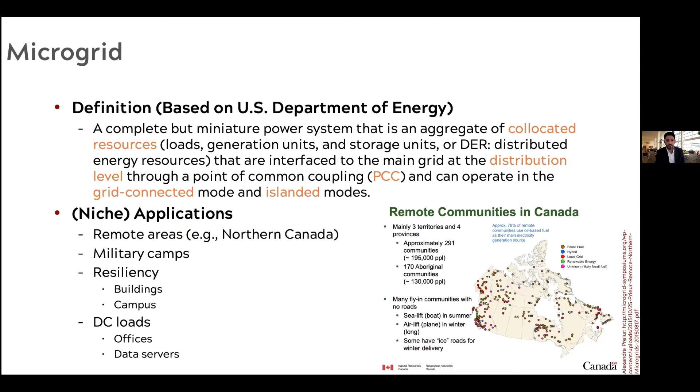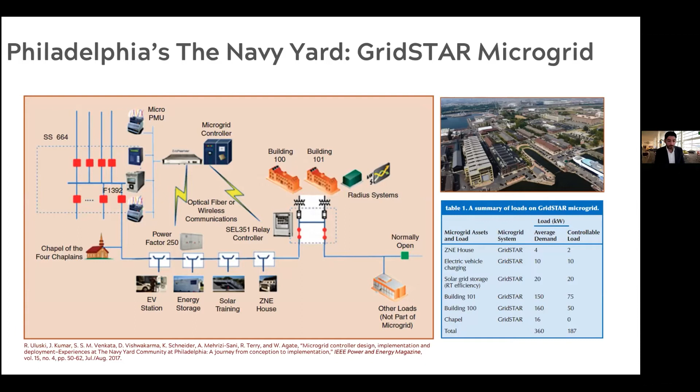And the idea was to enable operation of this Navy Yard as a microgrid to ensure that we had availability of power for the highest tech tenants that they had. The bakeries, essentially commercial entities, bakeries, Old Navy, the clothing store, offices, and so on. So that was kind of a demonstration project quite a few years ago.

Actually Washington, my previous state and my new state, both of them have quite aggressive renewable portfolio standards. Both of them 100% by 2045. California, 100% similar by 2045, and so on. So just a disclaimer that most states in the US do consider hydropower to be part of the renewable portfolio.

Washington actually considers, I found this back when I just became a professor, fuel cells. It's based on hydrogen, but they also consider that to be part of the renewable portfolio. Essentially, that means they can use some of the incentives.

So now, with the exception of the hydropower, most other renewables, mainly PV, solar photovoltaics, and type 3 and type 4 wind units, use inverters to interface the energy generated to the grid. Essentially, the PV units need inverters to convert DC power to AC. Wind units already generate AC, but then they need inverters to be able to condition that power and interface it to the grid at a higher quality, essentially a nicer sinusoidal, regulated frequency type of waveform.

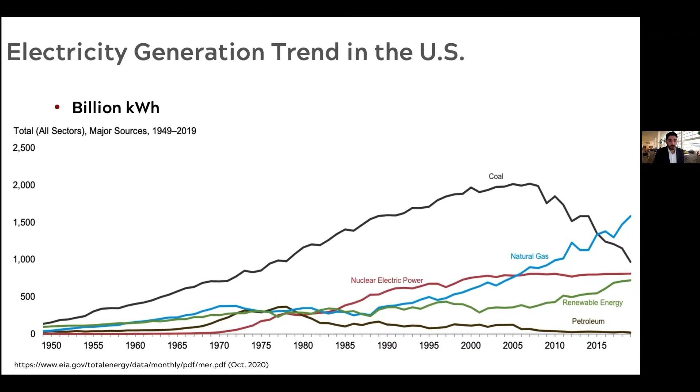So with this shift to inverters comes variability, more distributed generation, different protection strategies, different power flow patterns, and so on. Essentially, what's happening is the generation and load mix is changing. So for example, the BPA service area, I'm sure you're familiar with Bonneville Power Administration, providing power to Washington, Oregon, Idaho, part of Montana.

They have experienced several times 100% wind generation. Typically, this happens in fall, in the October timeframe, because there is not a lot of water. There are fish restrictions, and most of the generation can come from wind. The ERCOT system in Texas has also had instances of 50% instantaneous wind. And the Australian power system also experiences quite routinely more than 70% instantaneous inverter-based generation.

So again, we are moving from a synchronous generation-based power system to a power system that has more and more inverters. If it's the main power system, as we discussed, because of wind and PV and so on, we're getting more inverter-based generation. If it's microgrids, many of them do use inverters as their main form of interface between generators and the system. Of course, a similar thing is also happening for the loads.

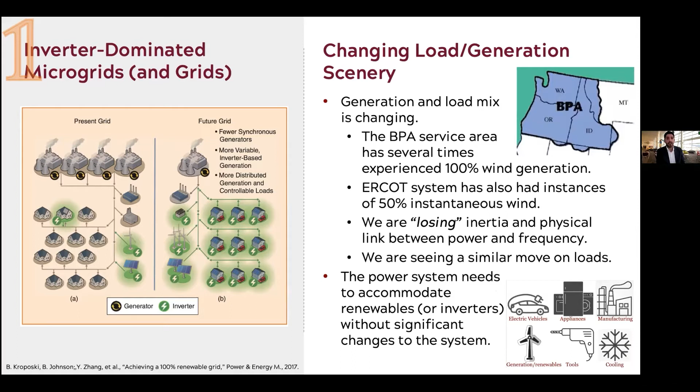We are moving from just motors to drives, which are really motors plus inverters that allow more control. With lights, more and more lights are becoming converter-based, and modern appliances also have intrinsic converters inside. So on both the generation side and load side, we are moving to more and more inverters.

So this transition has also brought about changes in the operational standards. For example, the minimum standard for integration of renewables, IEEE 1547, in its first iteration, actually required that inverter resources, or DERs in general, would disconnect in response to a disturbance. So essentially the idea was, hey, we don't really know, and this is 2003, we don't really know how you work. So when something happens in the system, please just disconnect, hoping that you're not doing too much harm.

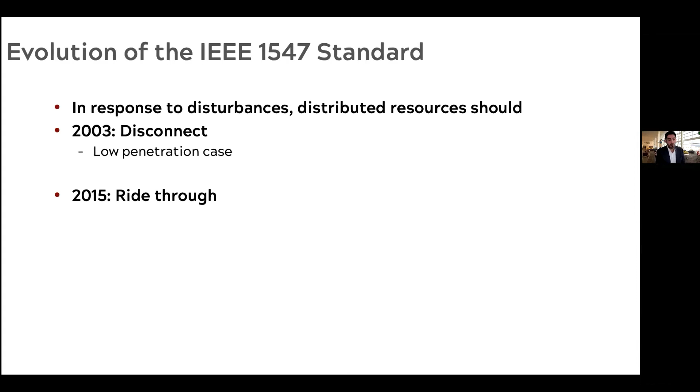It took the community about 12 years to feel the need and then come up with an updated version of 1547. So in 2015, the standard was updated to actually require the DER units to ride through disturbances. So from, hey, disconnect, now the inverters or DERs in general are required to ride through. So the idea is, well, don't disconnect, we need your generation, but don't do much else either, because we still don't really believe in your capabilities, right? That was kind of the thinking.

And then only 3 years after that, in 2018, the standard actually started requiring the DER resources to provide support. So previously it was, in 2003, disconnect, then standby, then actually actively contribute. That's the 2018 version. And that's what the new power system terminology generally refers to as grid support capabilities. Things like voltage ride through, frequency ride through, voltage support, frequency support, startup ramp rates, and so on.

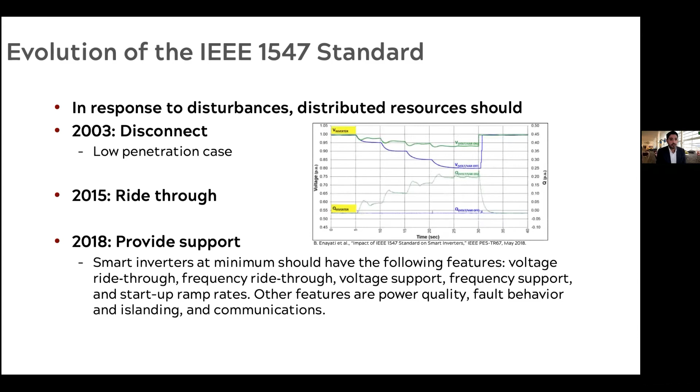Then these inverters that we talk about, regardless of their topology, regardless of exactly how their circuit looks, can operate in two main modes of operation, either grid following or grid forming. Grid forming has become kind of a buzzword these days. Essentially, they're considered to be the key to operate the power system with large shares of inverter-based resources. And the terms are slowly becoming a standard. I remember I first read these terms in a paper. It was a very good paper back in 2007.

But I guess the power system community at some point decided that it needed to refer to power electronics with terms that were familiar for the power system community. So they introduced the term grid in the classification of these inverters. So now we call them grid forming, grid following, and so on. Of course, names are important. The moment the term grid forming became common use, power electronics also became a friendly thing. So that has helped quite a bit with using more and more power electronics in the power system.

Now, the way that I try to understand these terms is I say grid here almost means voltage. So a grid forming inverter would be an inverter that creates or forms the voltage for the grid, and then the grid following would be the one that follows the voltage of the grid. And roughly these terms are equivalent to master and slave controllers in microgrid terminology, or again, roughly PV and PQ buses in the standard power flow problem.

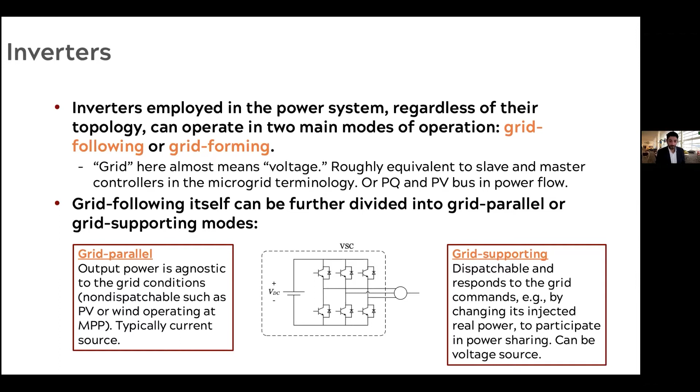So with that introduction, let's see what we will specifically be talking about today. We're going to look at the problem of control of gray-boxed and variable inverter systems. I say gray box instead of black box because typically we know some stuff about our inverters. We don't know all the details, but it's not that we are totally in the dark either.

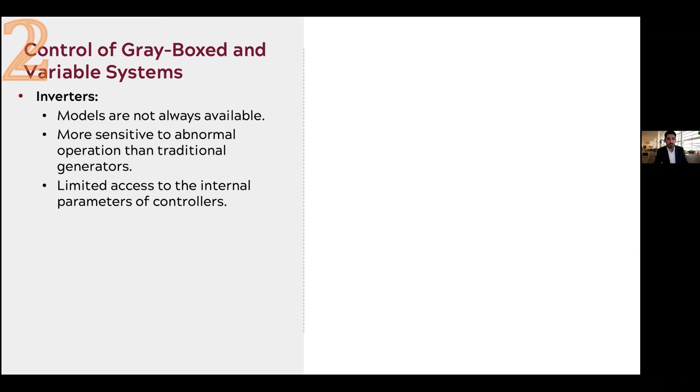Now, what is the challenge? With inverters, the models are not always available to us. Manufacturers and vendors do not share full-fledged models all the time. Inverters, of course, are based on power electronics, so they're more sensitive to abnormal operations compared to the traditional, good, robust synchronous generators that we used to have in our power systems. And I just mentioned we don't always have their models, but we don't always have full control over the parameters of the controllers either. So again, we know some stuff about those inverters, and we have some control, but not a lot of control.

At the same time, another reason that control of inverters is a challenge is the setting that we use them for. We just mentioned that we use inverters mainly when we have lots of renewables or when we have microgrids. And in both cases, the system changes quite frequently. So redesigning controllers would become quite a bit of a challenge. And even if you do redesign, the new controller would work only for some pre-specified configuration, and the performance again deteriorates when the whole system changes.

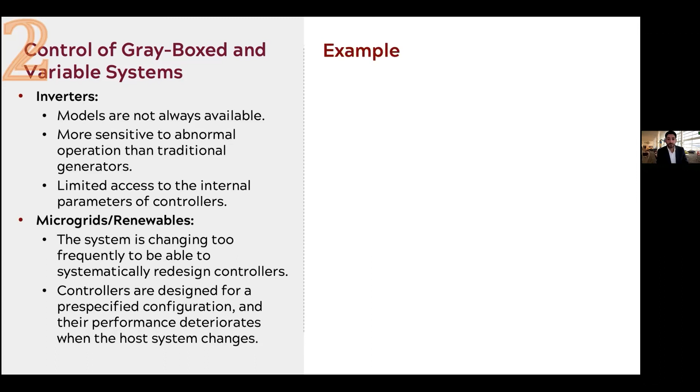So here's an example of what I mean by this. Here on the top right, you see the original system and its response to a certain step change. The overshoot 15%, settling time 32 milliseconds, something acceptable, not ideal, not too beautiful, but it works.

Now, same system, I disconnected one of the loads. Of course, this was a microgrid system. I disconnected one of the loads and I applied the same step change. Now, the overshoot is almost twice bigger than what I had before. So from 15, I went to 26%. And my settling time is also longer. Instead of 32, now I have 67.

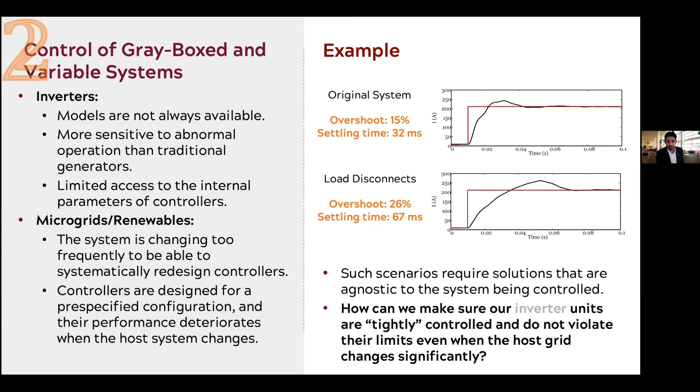So same system, same disturbance, well, almost same system without the load. Same disturbance, now I get very different responses. My system has become quite a bit slower. So the main question is, how can we make sure our inverter units are tightly controlled and do not violate their limits, even when the host grid or microgrid changes significantly? So that's kind of the control problem we are going to be talking about today.

Of course, control is not new. There are lots of efforts in terms of control. It's been an active area of research for as long as I remember, and it will remain an active area of research. Essentially, any engineering system you build, you have to be able to control it. Otherwise, it will be kind of like drunk driving. So that is going to be kind of an integral part of whatever we do as engineers.

If I want to very roughly categorize existing approaches for control to ensure that the dynamics of the systems are handled, we have analytical formulation and model-based tuning, in which essentially we develop a mathematical model of the system and then use linear, nonlinear control methods to devise the control parameters, or optimization-based methods where we create a model of the system in a transient simulation program. PSCAD is very commonly used these days, and then we run multiple cases to minimize some cost function by finding the optimal values for those control parameters.

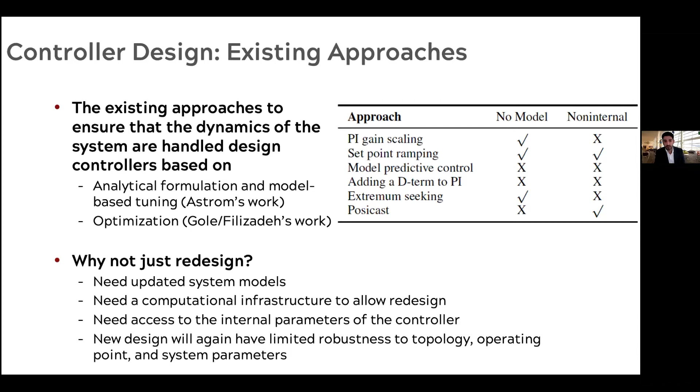This method can also refer to machine learning based control design, because essentially at the end of the day you have to optimize the gains for your neural network or whatever type of design you have. But the problem is they have limited robustness with respect to topology. Essentially, when the system changes, we have to redesign these controllers. And if retuning is needed, then it would be difficult because we have to go back to the field and implement the new changes. Of course, they need the models of the system, which is not really a luxury we can always afford in terms of inverters.

So we're going to look at this from kind of a fresh perspective, essentially an alternate idea. Instead of updating the controller structure and the parameters, which is essentially what the bulk of literature does, we seek to get a better response by instead manipulating the set point itself. So when you want to design a better controller, of course, the first thing that comes in mind is to update the controller itself. But in my case, if I do not really have access to that controller, then the idea is I try to manipulate the set point instead, which is essentially the easiest thing I can change because set point is something I provide anyways.

So, but how? We don't want to change our original controllers, as I said. We want to keep them in place, but we want to augment them with an add-on feature. And essentially, the basics of how this method works is this small graph over here. So assume the set point for some x of t has changed from x1 to x2. And that x of t could be any variable that I control. Could be current, voltage, real power, reactive power, angle, torque, whatever I'm trying to control. So the set point changes from x1 to x2.

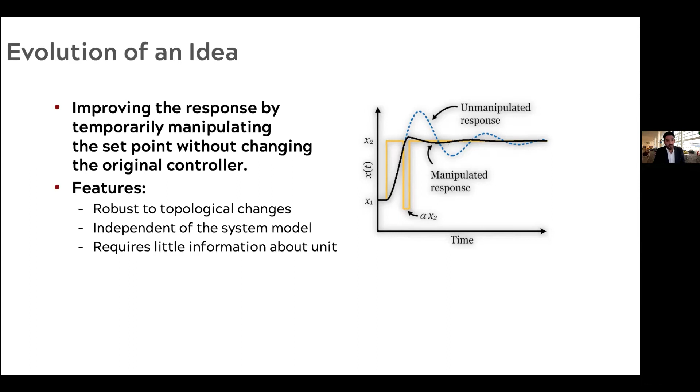So this is the essence of the idea. Extremely simple, also very effective. We're going to see a number of case studies to see how this method works. But first, in terms of how this method is going to be implemented, you have this standard control methods, a unit, your inverter, the primary controller, and typically these two are in a gray box because that comes as part of the inverter. And the set point comes from some higher level control.

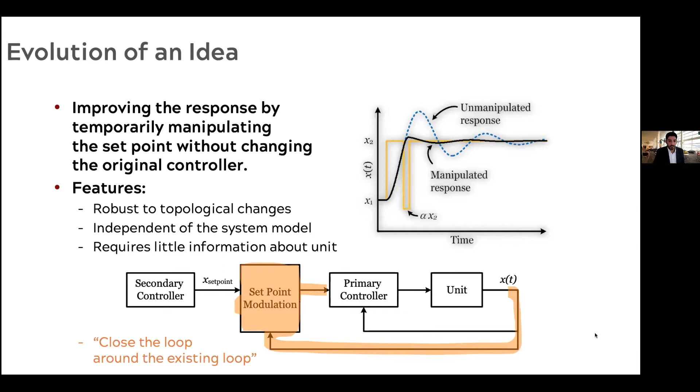What we are doing here is we are adding this set point modulation block that looks at the set point, looks at the response of the system, and based on these, it's going to manipulate the set point that actually is fed to the inverter system. And we are hoping that we get a response as beautiful as what I'm getting over here. So in a sense, what we are doing is we are actually closing another loop around the existing control loops of the system. So we are adding this loop.

All right. So of course the question is, how do I do this? Now we have shown for certain systems, and again a disclaimer, I'm talking about this to give you some confidence that this method is implementable. The idea does work. We are going to talk about the actual implementation in a bit, but let's see that this method does work.

Our initial idea was to apply this modification in the set point at some point T1, and then release that set point at some point T2. If you play long enough with the response of the system, you see that one of the good things you can do here is choose this time T1 so that when I reduce this, the peak of this response equals the reference, and that's how we choose T1. And then T2, the time that I release the set point, would be the time of this peak. So in this case, I actually need to release the set point exactly at this point.

So here's an example. This is the original response. This is now when I apply a set point change at time T1 and I release it at T2. Now this T2, you see that it's not exactly time of peak. Interestingly, my response is already better, but I was hoping for something even nicer than this. So let's see what happens when T2 becomes closer to time of the peak. So that's my next attempt. Response is better now. T2 becomes closer to time of peak. Better response, even better now.

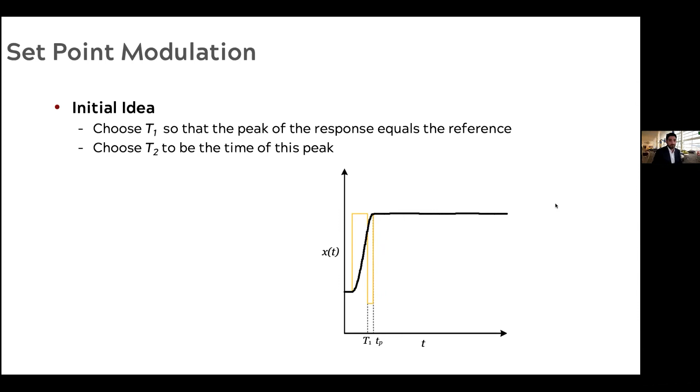And this is exactly when T peak and T2 coincide. They're the same value. So in this case, you see that I have no overshoot. I have essentially no delay in getting the response settled. A very beautiful response, right? I mean, if I can have this, then I can essentially finish my job and go home. The problem is it's not really implementable this way, right?

So the idea does work if I knew what T1 and T2 were, but the problem is that's actually too much to ask. To know T1 and T2, you either have to have a fancy, faster than real-time simulator, or you have to have the closed form solution of the system. Somehow you need to be able to predict the behavior of your system. Of course, system parameters are needed too, which is, again, something that we don't necessarily have.

We're not going to get too disappointed. It's true that we cannot implement this method based on T1 and T2 calculations, but there are still ways to implement this, because otherwise I wouldn't be talking about this approach here. So in fact, there are multiple ways. I'm going to walk us through those methods. So again, we have a good theoretical solution, but we're going to see how we can actually implement that. But it's a good start. I mean, we know that we are onto something.

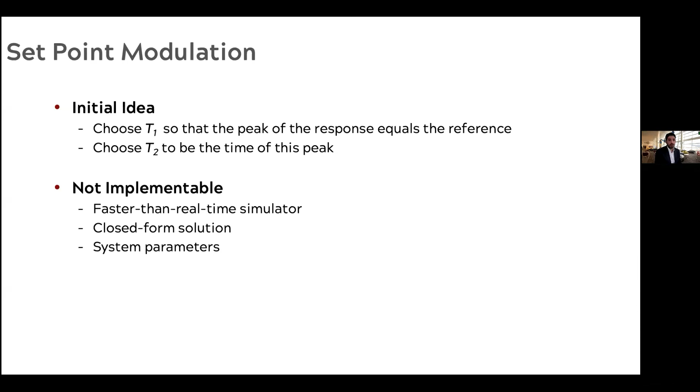So before I move on to showing our case studies to show how we improve this method, I'm going to show some of the earlier case studies we implemented using this finite state machine, and see how our method actually works, and then we are going to improve that. So the first case study, we are using the IEEE 34 bus system. We added 3 DG units, one here, one here, one here. And this one operates in the grid connected mode. I'm going to apply a set point change in DG2 in the current.

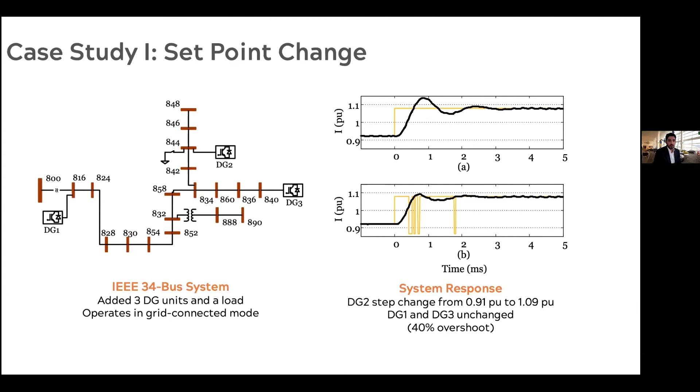The top figure shows the response when SPAACE is not active. So I have about 40% overshoot and a longer settling time. Here's the response that I get when SPAACE is active. You see SPAACE has applied these temporary changes in the set point, and then as a result, I get a response that is much better than the original response. I'm saying much better because this 40% overshoot could actually violate the limits of the switches that I have in the inverter system. So I do not want to have those. So in one simulation scenario, we're seeing that this method is working. So let's look at another scenario.

One of the beauties of this approach is that it can be effective even when the disturbance in the system is not necessarily a result of a set point change. We just mentioned microgrids have to be able to operate in grid connected mode and islanded modes. So that transition is going to introduce some disturbances. Connection of new sources or disconnection of loads, those are going to also introduce disturbances in our system. Here we are looking at a load disconnection scenario. So again, same system as before. I have this load over here and I disconnect it. Of course, when I disconnect it, my system is going to go through some transients.

Here is the current response. I have about 15% overshoot, the black trace we're looking at. And when SPAACE is active, I still obviously have some transients, but I do not violate the limits. In this case, I had 10% over the 1 per unit value. So I do not violate the limits. So we are seeing that SPAACE does work in this scenario as well.

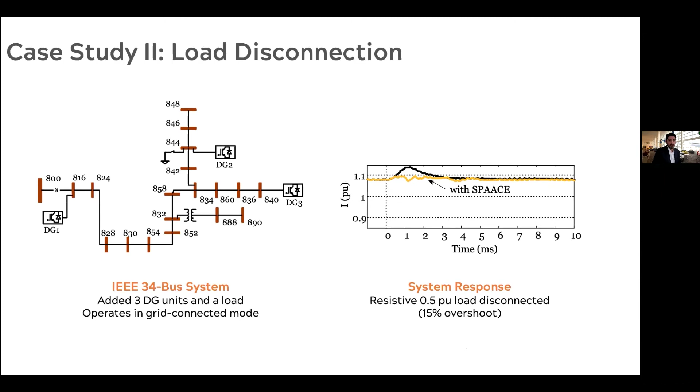Let's look at another scenario, essentially looking at the robustness of our approach. We are looking specifically at an unbalanced system. So the 13 bus system, which is an unbalanced feeder, and we added a DG unit, a test load, and this is now going to operate in the islanded mode. So it's going to also be kind of harsher compared to the previous case. Previous case, we were looking at current control. Now here we are looking at voltage control. So what happens here is I'm going to disconnect this load and see what happens.

So without SPAACE, I see this black dashed trace. As you can see, I have a fairly sustained oscillatory behavior of voltage. I enable SPAACE, and then I get this yellow trace, which essentially is able to settle the voltage in about 1 second. So significant improvement. Essentially, we are turning an oscillatory response into a stable response in this case study.

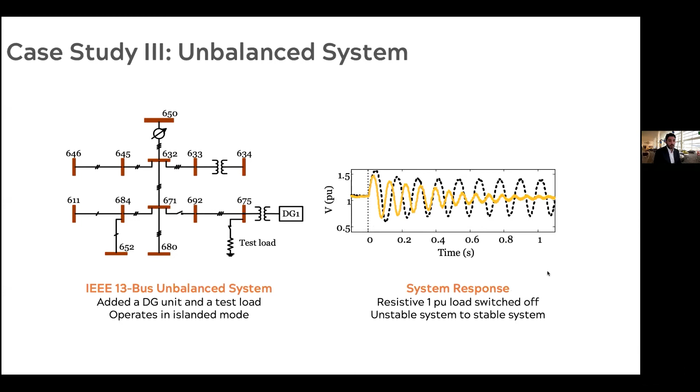So now let's take the idea one step further and look at a variant of SPAACE, which we call smooth SPAACE. So why? Remember, we said the original version, we were implementing that using a finite state machine, and we were applying set point changes that were kind of like a step like this, right? So we're going to address those.

First, there can be scenarios when I use a state machine, my machine can get stuck in one certain state. In that case, SPAACE would try to apply multiple changes in a set point, only to find that they're not going to do much, and then we won't see much improvement. The way that we implemented the state machine in even the previous work was actually it would detect those repetitive changes in the set point, and then at some point it would not apply further changes in the fear that it would make the system unstable. But it's good to actually not have this problem. So that is one reason that we are looking at a better implementation.

And then the other reason is the type of set point changes we apply using the SPAACE are step changes. And in several applications, probably the more dominant example is drives, you do not actually want to apply step changes in a set point because that could cause too much stress. In fact, too much mechanical stress.

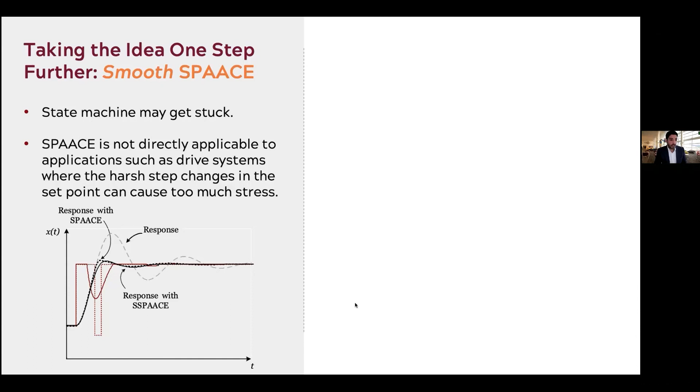In fact, many drives applications do not apply a set point directly to the system either. They apply it through a low pass filter. So a benign change in set point, very slow. Of course, the drawback is it's going to make your system, your controller slow. So we're going to see how we can approach this problem with an improved solution now.

So the first iteration, the first idea that we had was essentially to make sure that set point changes were smooth. So instead of applying a set point change in a step form, we're going to make it proportional to the predicted tracking error. So my set point remains the same. I'm not modifying the set point if the error is small, essentially limited within my bounds.

And then I would change it with a factor m of t, which is essentially some scaling factor m times predicted error. So if the predicted tracking error is big, I'm going to apply a larger change in the set point to compensate for that error. And if it's small, then I'm going to also make the modification smaller. Here we are using a predicted form of the error to speed up the process.

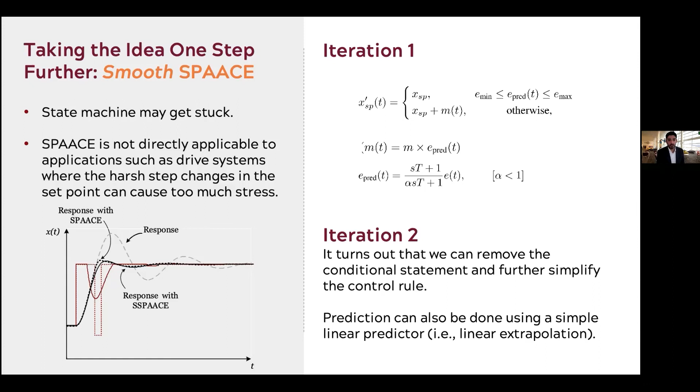It turns out actually we do not need to check for that. You can just remove the conditional statement and apply this term as the modified set point all the time. Of course, if the error is small, then the modification would also be small as well. So this makes the implementation of this approach very, very simple. It also makes stability analysis and looking at the theoretical behavior of the method simpler as well.

So let's see how my controllers would work with this updated implementation. I'm going to show some of the experimental results because, of course, we always wondered, okay, what I do in PSCAD simulations is beautiful and nice, but how do I know that I would be able to get similar results in the real world?

So there are two sets of experiments here, some based on a drive system, which we worked on with TU Graz in Austria, essentially an inverter-based load, which was the drive. I have a DC machine in the back. It's not very clearly seen here, but this is essentially the DC generator, and as a load, it uses an induction motor.

The controller is implemented in DSpace, which essentially uses a variant of Simulink. So we implemented this in DSpace, it's uploaded to the controller, and then we're looking at certain scenarios. The first case, we're looking at a step change in the speed set point. On the left, I'm showing simulation results, and on the right, I'm showing the experimental results. If you look closely, these results are very, very similar.

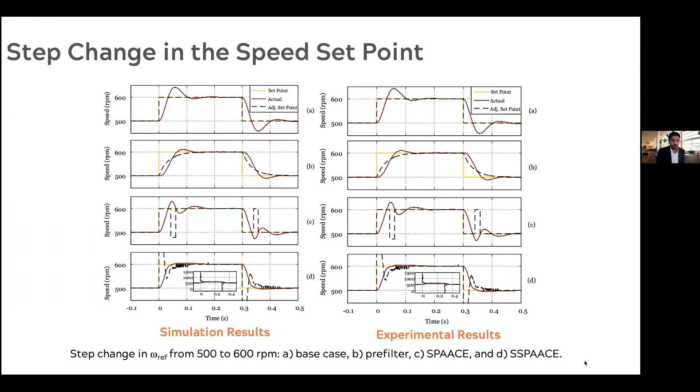This is the same slide, the same kind of case study, except that now I have superimposed all the responses on top of each other. So I have the base case, pre-filter, SPAACE, and SSPAACE. So with just naked eyes, it's quite obvious that the black trace, which represents the response with SSPAACE, has really good behavior.

If you look at the numbers, the base case has 42% overshoot and a settling time of 140 milliseconds. SSPAACE has a very small overshoot, 4%, with a settling time that is about 1/3 of what I had before. Rise time has stayed the same. This is different from the pre-filter case, which does reduce the overshoot, only 10%, but it also increases the rise time. So with SSPAACE, I get the best of both worlds.

Overshoot is small, settling time is small, and rise time has not really changed, essentially because of the way that SPAACE works, it's not going to really apply any changes in the set point unless it feels that we are going to violate the limits. And at this point, essentially 67% of the step, SPAACE is not really active yet. That's why we are not going to see much difference between the base case and the SPAACE case.

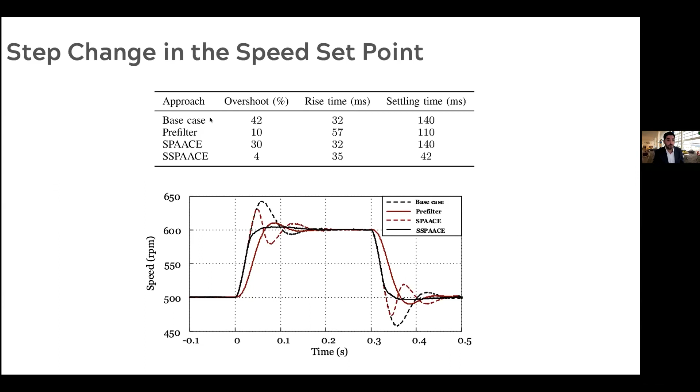So another case, this is load change, where the disturbance in the system is not because of a set point change. And you're seeing that essentially pre-filter is hopeless because pre-filter works on the set point. There is no set point change, so pre-filter is not going to do much for us.

The deviations in speed that I get when I have a load change, with the base case, I have 48 RPM change. That's about 10% overshoot or undershoot. Pre-filter is the same. With SSPAACE, I get only 12 RPM. So again, you can see that the response that I'm getting over here is much better than the response that I was getting with the other methods.

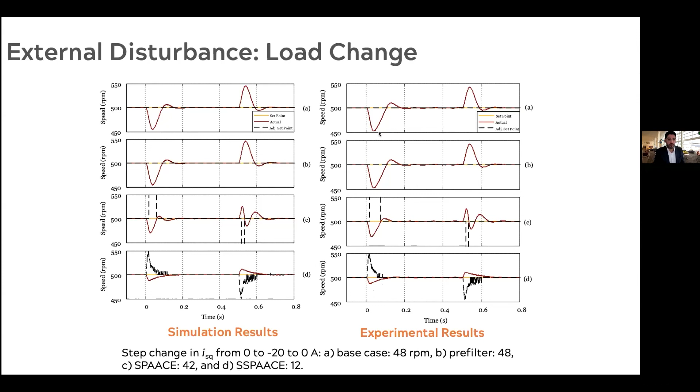And we also were interested to look at the sensitivity of this approach to the system parameters. What we did in this particular case study was to change the inertia constant of the system. Of course, we didn't do this in experiments. We did it only in simulation because you can change the inertia of a motor quite easily there. So we're looking at the inertia that is 1/3 of the original inertia, and then another case where the inertia is 3 times as much.

So again, we're changing the speed from 500 to 600 RPM and then back to 500. The base case has an overshoot of 50% and a settling time of 80. With SPAACE, again, the red trace is what you are looking at over here. My overshoot is practically 0%, and settling time is 50, so shorter than the original 80 milliseconds.

These are actually some really encouraging results, because remember we were talking about losing inertia and low inertia grids. So in this case, we're showing that if we have good controls, kind of controls like SPAACE, that won't really have impact on our system. Of course, there is more to a power system than just the primary controls, but at least this shows that with our implementation, a reduction in the inertia is not going to really cause issues for our control system.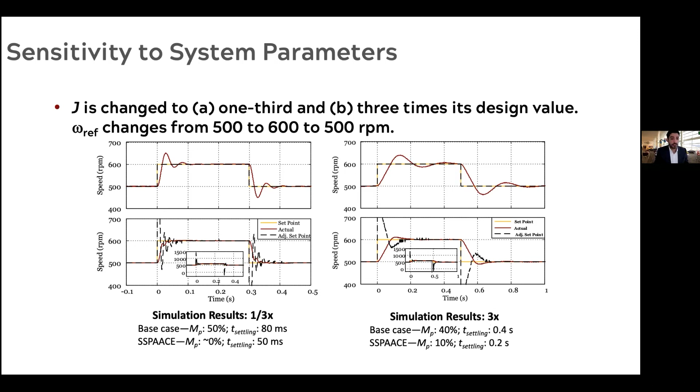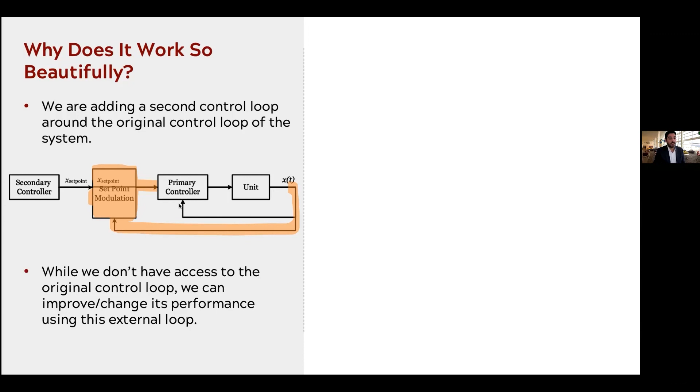Let me skip this. Let's take a step back and talk about why this method actually works. What is the reason that this method seems to be successful? As we said, we are adding a second control loop around the original control loop of the system. So this is what I had, and then I'm adding this set point modulation block around that. If you remember, the reason we did this was because we didn't have access to this primary controller, but we wanted to improve the response of the system. So we said we would do it with this external control loop.

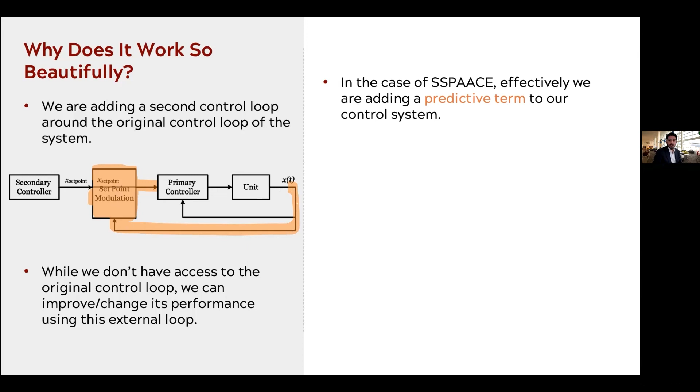Now, in the case of SSPAACE, effectively what we are doing is adding a predictive term to our control system. I'm not showing the equations here, but if you do write the equations, even for, say, a PI controller with some arbitrary transfer function for the rest of the system, you see that the effect of adding this extra control loop is, if you're using a PI controller, it really adds a D term, a derivative term, and changes your PI into a PID. And because of that, it improves your performance.

And even if I do not use a predictor, so we mentioned we use prediction to improve the performance, but even without a predictor, this act of set point modulation still improves the response, because it boils down to boosting the P term. Assuming the original control is PI, it effectively boosts the proportional term, so it makes the system faster. So it's not all magic. There's a reason behind it.

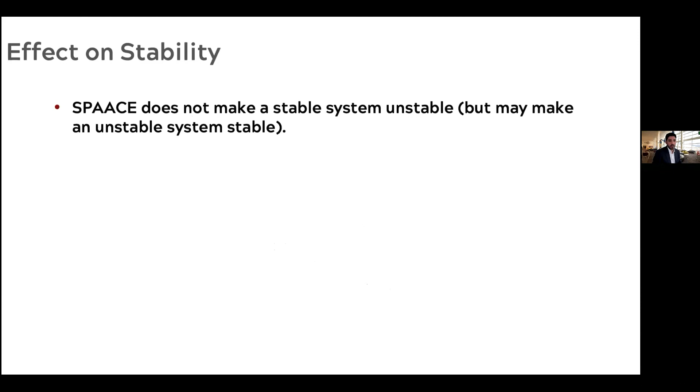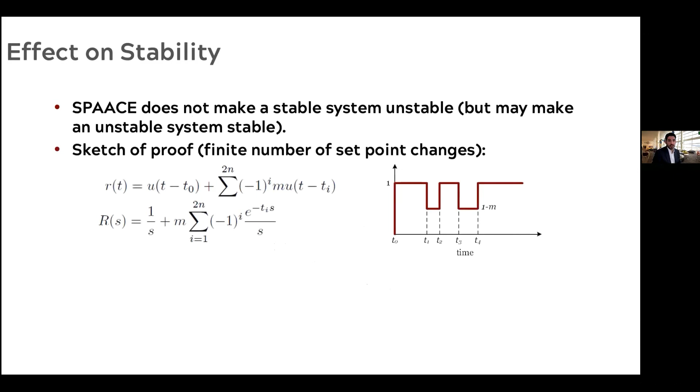We can actually augment this approach to find an upper bound for M. M is the scaling factor that we use, essentially how much we are going to change our set point. And then the effect on stability: the idea is that SPAACE does not make a stable system unstable. And as we saw in some of our case studies, it may make an unstable system stable.

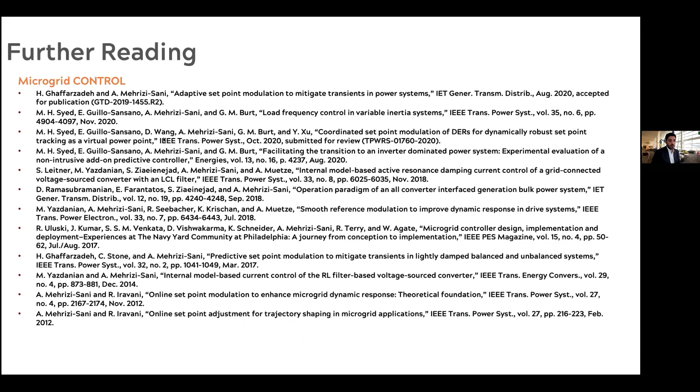So with that, let me stop here. This is a number of papers that we have written based on this work. And I think I would stop here. If there are any questions, I would be happy to answer those.